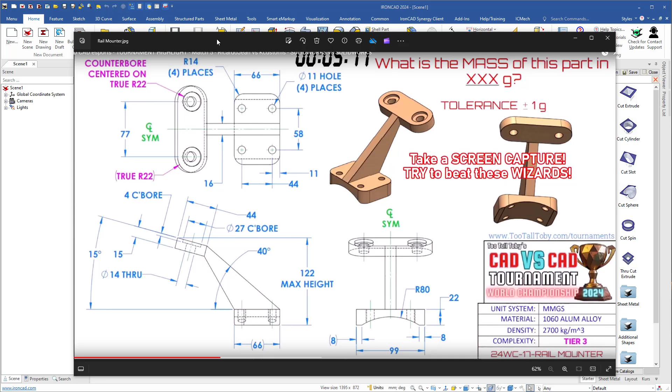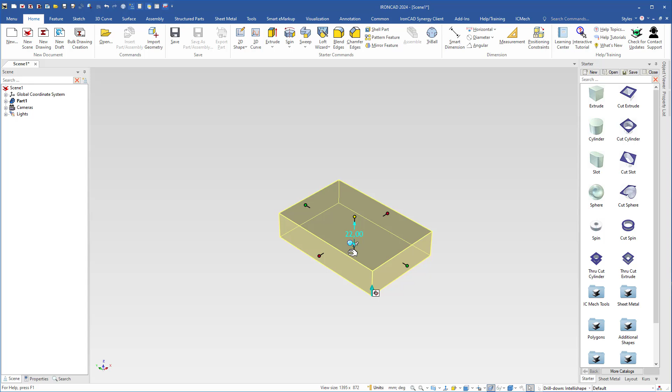I will move the image to my second screen, and I will begin with an extrude shape, the bottom plate. The length is 99 and the width is 66. Thickness is 22, like so, and then I will remove some material here at the bottom.

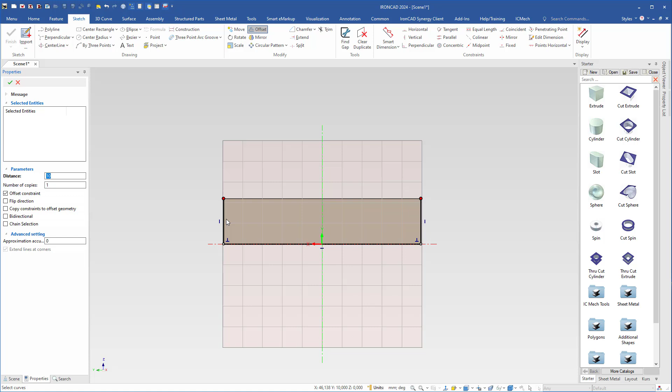So I will use a cut extrude, drop it here on the midpoint, right click, go to edit cross section, use W to look at, remove these lines. Then I will project that line or edge, this edge and this edge. Then I will use offset to move or make a copy of these two lines 8 millimeters from the side.

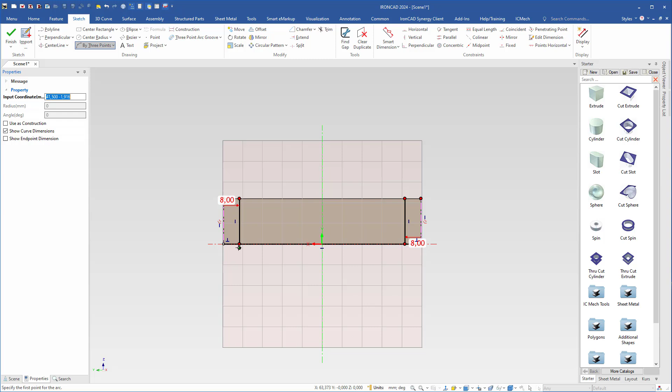So I will type 8 here in the properties, remove the offset constraint because I don't need it, select that line and this line, click OK here, and then I will come up here to arc, 3-point arc, select it, click on this endpoint here and this endpoint.

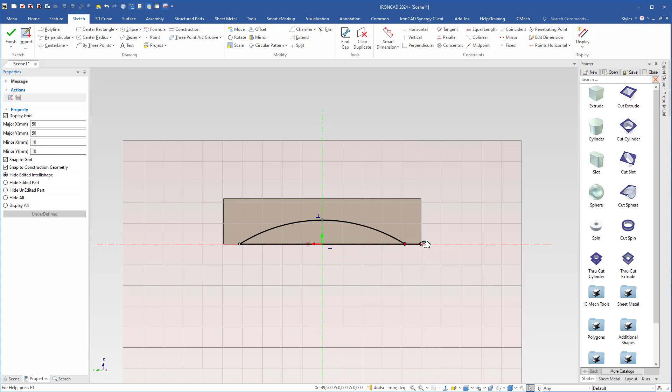Right click here and type 80 for the radius. So now I can remove these two lines and these two and join these endpoints here and on this side as well. So now I can click finish and cut through the part like so.

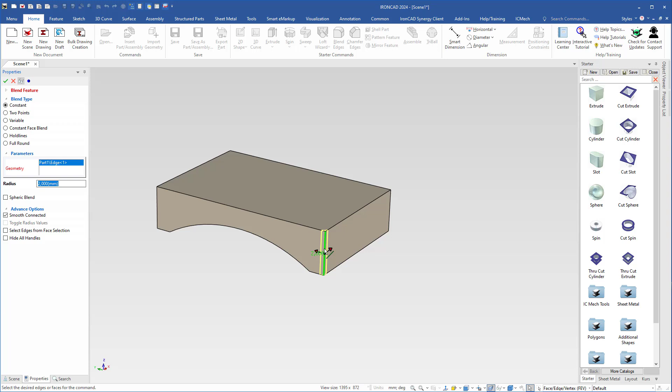Then I will also round the corners. I use blend to do that. Select blend, select this corner or this edge. The blend should be 14. Select that one as well, like so, and this one and the other one here, the last one on this side. Hit enter.

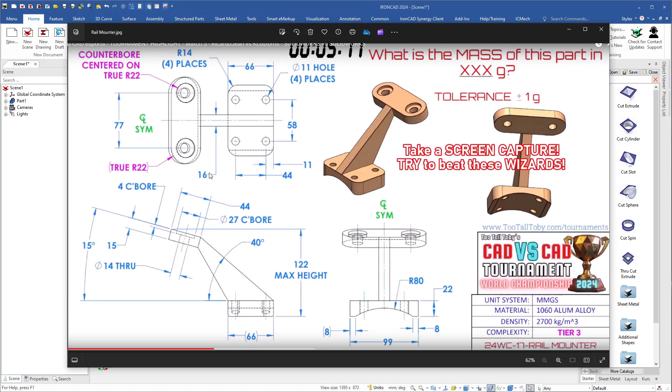Then I will continue with this arm. We see that the angle here is 40. The width is 16 and it's positioned at the center of the bottom plate. So I will use an extrude shape, and I will drop the extrude shape on this side so that I will have the cross section on this side here.

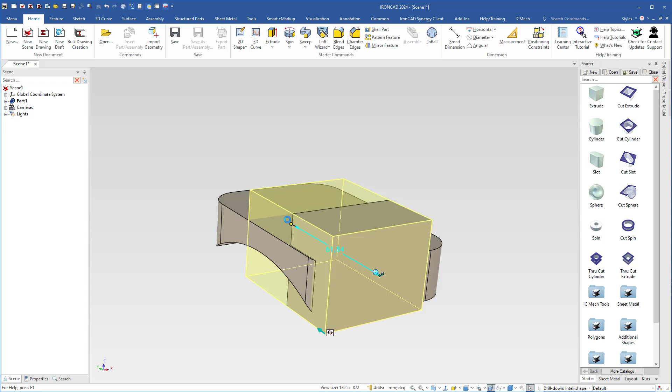Then I right click, go to flip extrusion, grab that handle, snap it to the other side, and I will also snap this handle to the top, and right click and push this height handle here and drop it. The thickness or the width of this one should be 16.

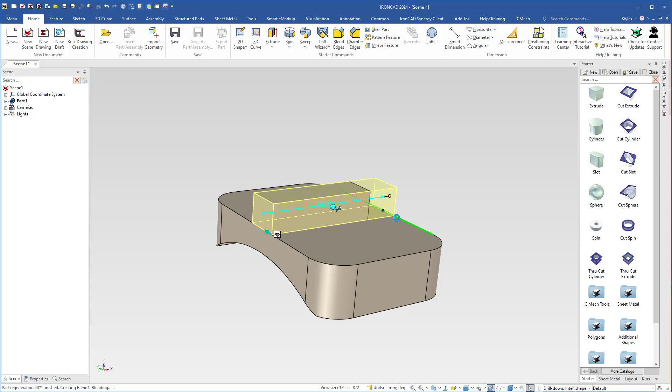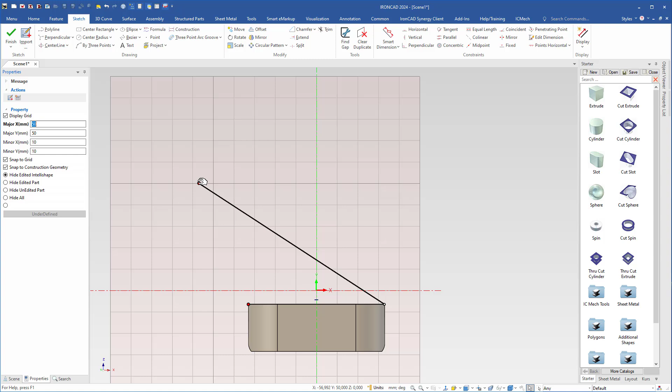Then I snap it to that side and this side. Alt E to go to edit cross section, W to look at, and let's see now, and I will delete that line as well. Then I will grab this one, I will zoom out a bit, make it long enough like so, and this one, the angle of this one should be 40.

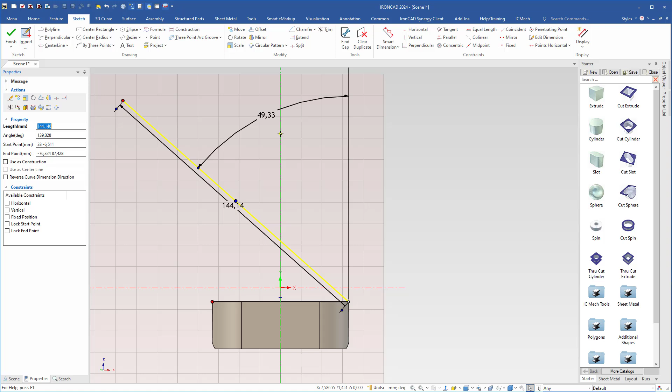So I will click on this side so that we have the dimension here. We know that the total angle of this side here should be 180 minus 40, but you can also grab this arrow here and drop it on the y-axis. So now we can double click and it's easier. Type 50 and hit enter. So now it's 40 degrees here.

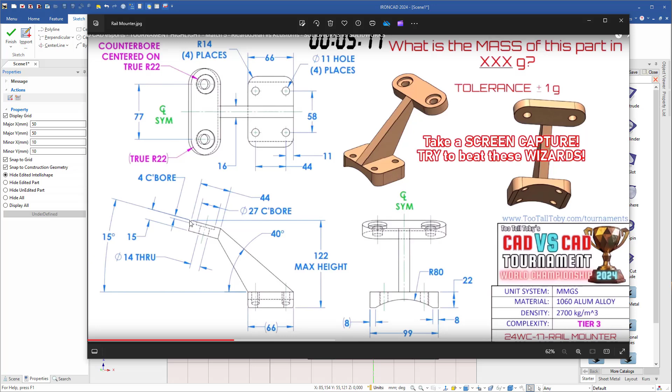But we don't know the length here because we know the height, 122 to this edge up here on this part. So I will do like this. I will right click, use a polyline, click here, add another one here to the endpoint to get a close profile. Then I right click, go to finish drawing, like so.

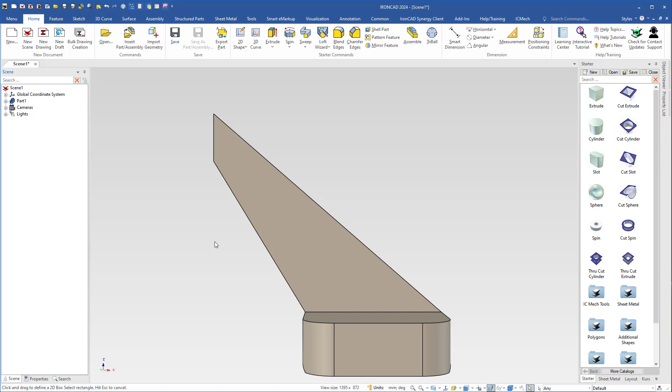So now I will create this part.

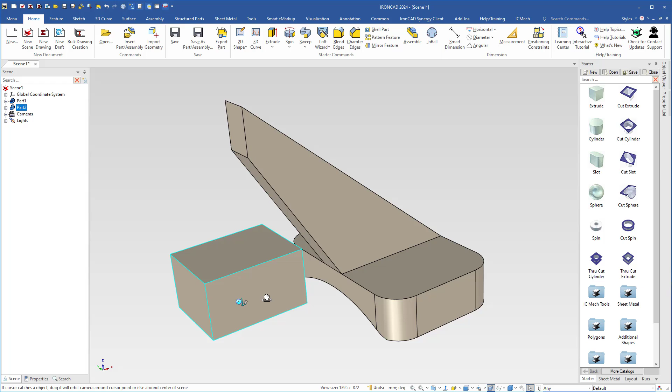We see the angle here is 15 degrees, 44, 77 between the center points. So I will grab another extrude shape and drop it here, so it will be a second part, but I will join it later. Let's see now, 44 in this direction and 77 here. Thickness is 15.

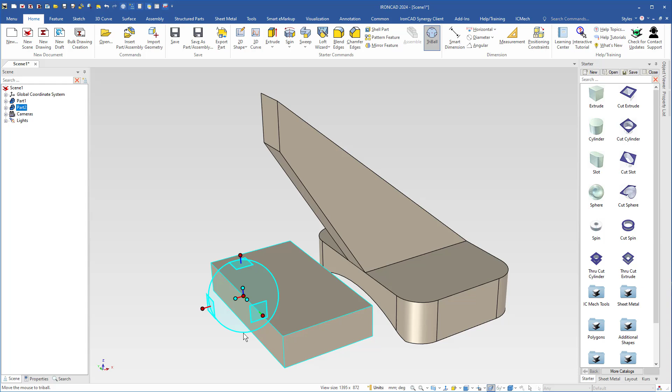Like so, and then I select it, use the triball. I will move the triball to the midpoint of this edge here. Let's see now, select edge, and I will move it to the center of this edge. Now the height, the distance between that edge and the bottom, is 122.

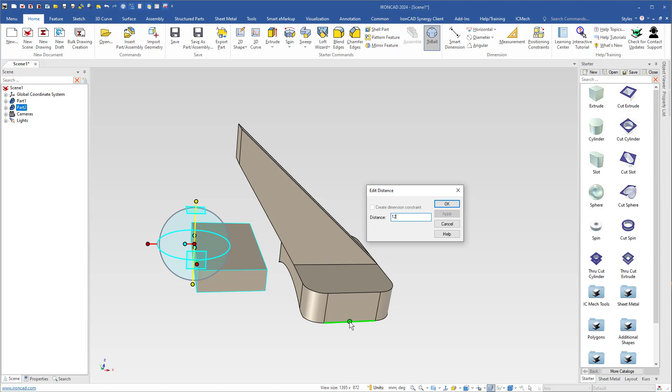But we don't know the exact distance between this side and this edge, so we have to figure it out. We will do it like this: first I will rotate this angle, or this part, 15 degrees.

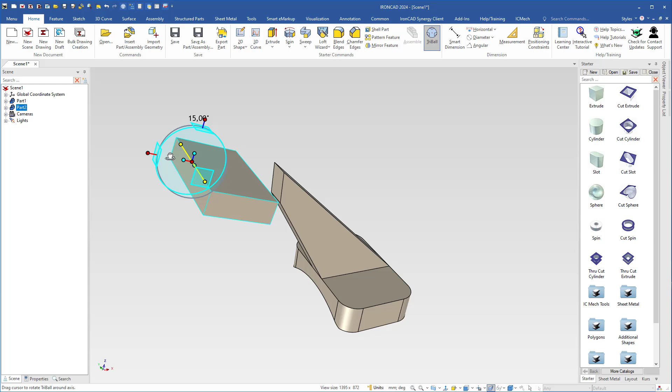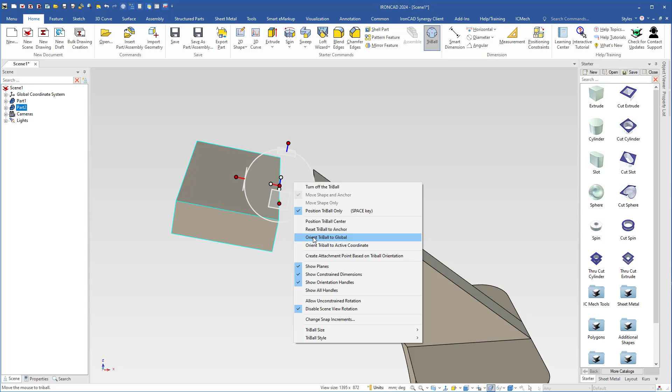Like so, and then this edge here should now touch this surface or this face here. So I have to move the triball to the midpoint of this edge, and then also right click and orient triball to global, so that we can move it in this direction. So now when I select this axis, right click and choose to point, and select this face, it will touch that face. So now we have the right position of this part here.

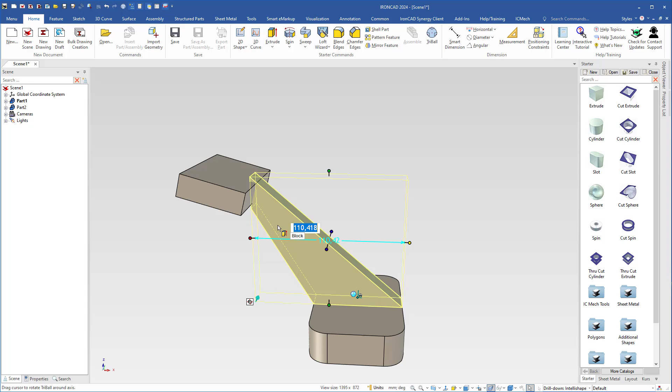So now I can change this one, the arm. I go to edit cross section, W to look at. Now I can move this endpoint to this edge or the corner, do the same here. And then right click and finish drawing, like so.

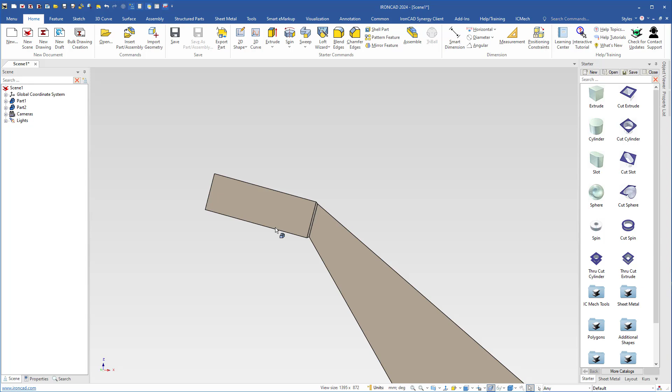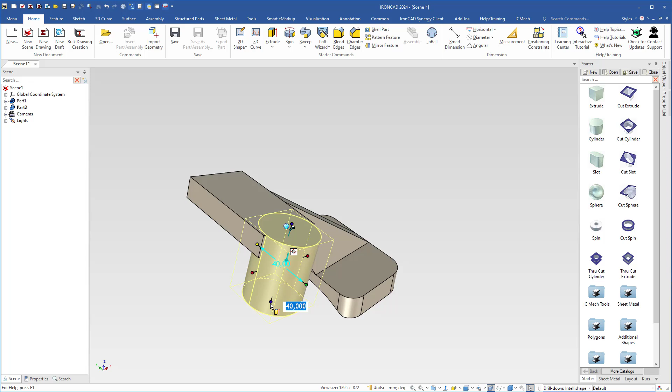Then I will add a cylinder here, drop it on this side on the midpoint. Make sure that I have the camera in the right position so that the cylinder will have the right direction when I drop it. I right click, go to flip extrusion, and it will go through the part, or snap it to the bottom here, then change the diameter, snap it to that side here.

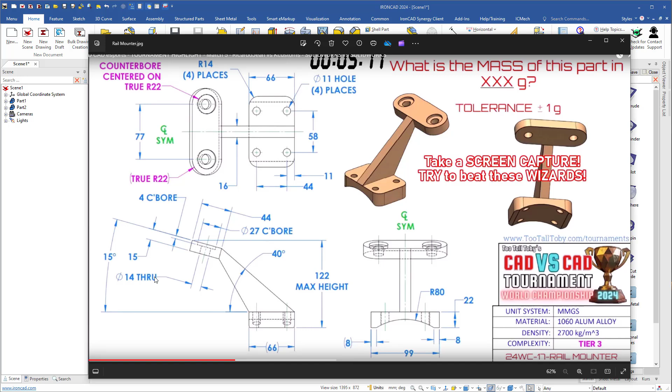So now I will cut some holes. This one is 27, the depth is 4, then the other hole is 14. 27 and 14. I will use a cut cylinder, drop it here, that's 27, and the depth is 4.

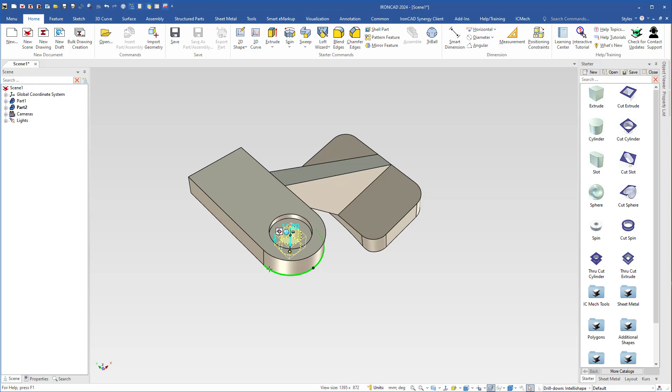Now I will select another cut cylinder, drop it here, that one is 14, and it will go through the part like so. Now I will select this cylinder, shift select the hole like so, and then this one.

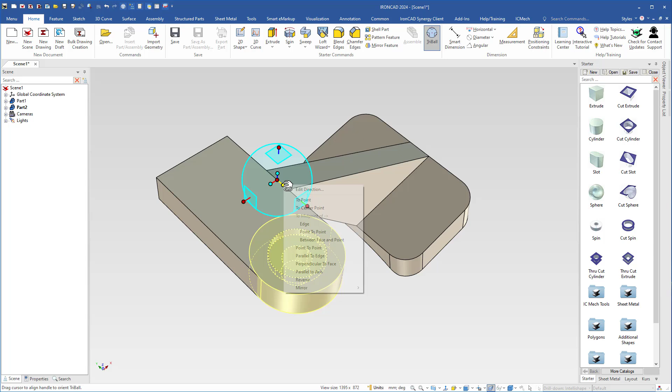Use the triball, move the triball to the midpoint of this edge here, then right click, mirror and link, like so. Then I will cut a hole here.

Cut cylinder, drop it on the center point first, then I will change the position of it. The diameter is 11. It will go through the part.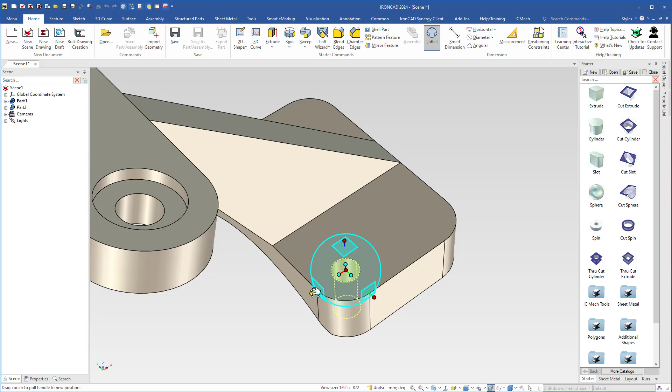Use the triball, and the distance from the center of the hole to this side is 11 millimeters, and then the distance between the holes on both sides is 58. So that means if I now right click, the added distance from this point should be 58 divided by 2.

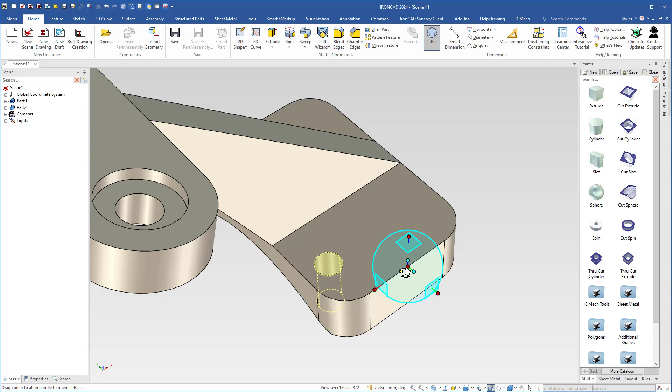So now I can move the triball to the midpoint of this edge and mirror, let's see now, right click, mirror and link, select that hole, turn on the triball again, move the triball to the midpoint of this edge here, and then mirror and link.

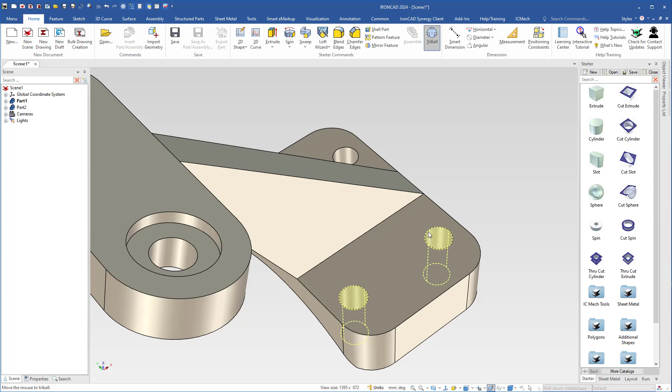So now we have the holes in the right position.

So this is how we can create this rail mounter, but we see that we have two parts here, so I will join these together: select them, go to feature and boolean union, and click OK, like so. So now there is only one part.

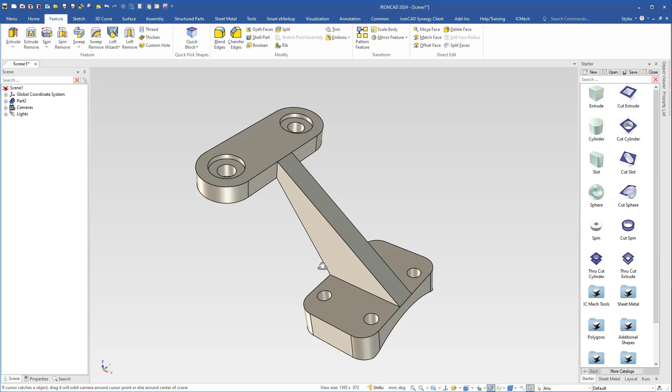So this is one way of doing it, so I hope that you have found it useful.